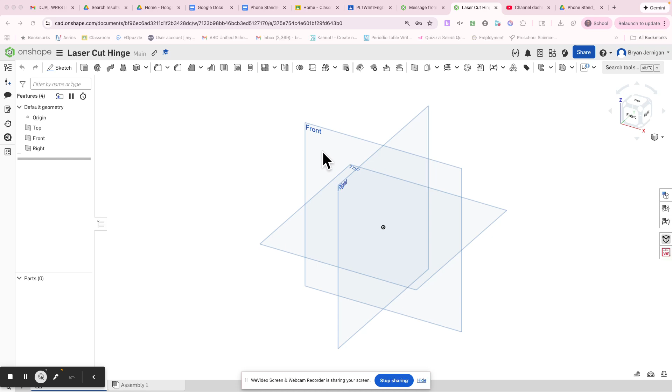So I'm going to show you guys how to create a laser cut hinge. Let's do a laser cut hinge.

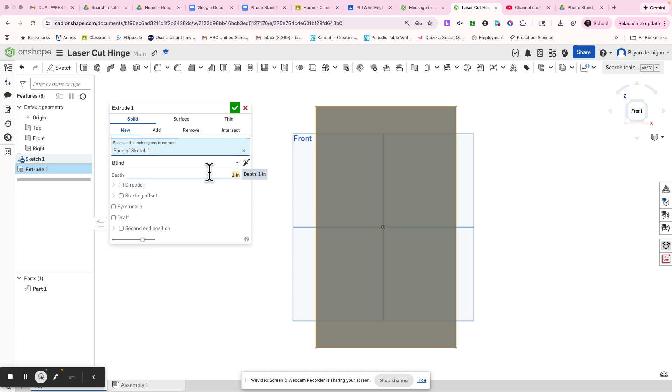First, we're going to create a sketch on the front surface, and our sketch is going to look something like this. We're just going to extrude that an eighth of an inch, or whatever the thickness of your material is.

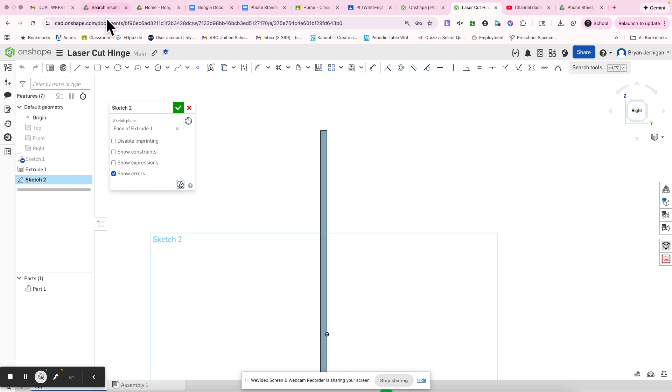Now we're going to look at the side of our part. We're going to create a new sketch on this surface, and I'm going to look at that surface and draw a corner rectangle down to about there on our sketch.

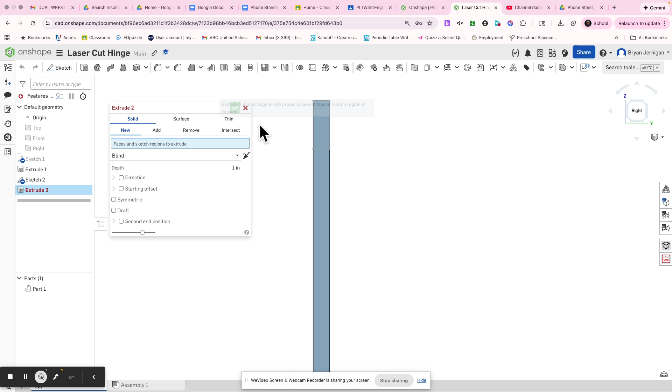We're going to go ahead and extrude that sketch. Of course, you're going to be using dimensions here. We're going to extrude that sketch some distance—I would choose double the thickness of your material. So ours is an eighth of an inch, so we're going to 0.25.

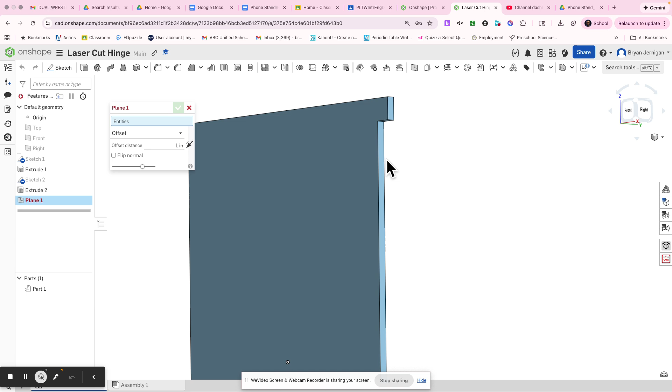In this case, I want to mirror that feature across the surface. So I'm going to create a work plane, and I want it to be a mid plane, between that plane and this plane. Now I have a mid plane.

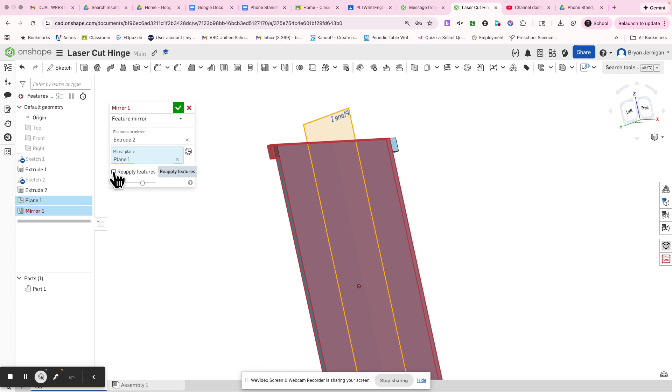Then I'm going to do a feature mirror. I'm going to mirror this extrusion, and the plane I'm going to mirror it across is going to be this plane. I want to reapply features so that I have this nub on both sides. I could turn off all my work planes now.

Now I'm going to do a new sketch on this surface. In this case, I'm going to use the middle of this part to create a circle.

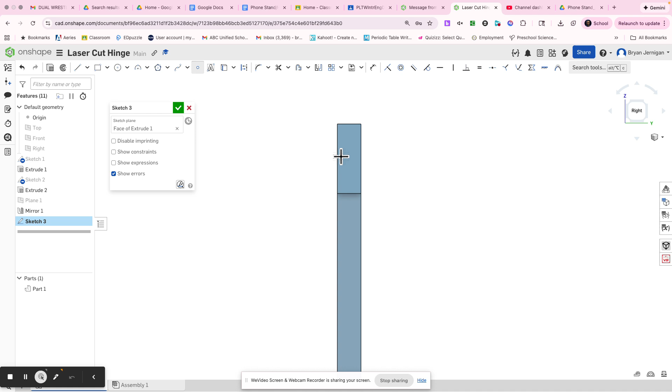I'm just going to use the point tool, going here to the middle. Actually, let's use this surface, that one, and this one. We're going to go here, go to the middle here, and then to the middle here, and go down, and then it gives us the middle point. So now we have a point.

Now I'm going to draw this circle so that it touches the corners. So there's my circle. I'm going to do another circle that's going to be larger than that first circle.

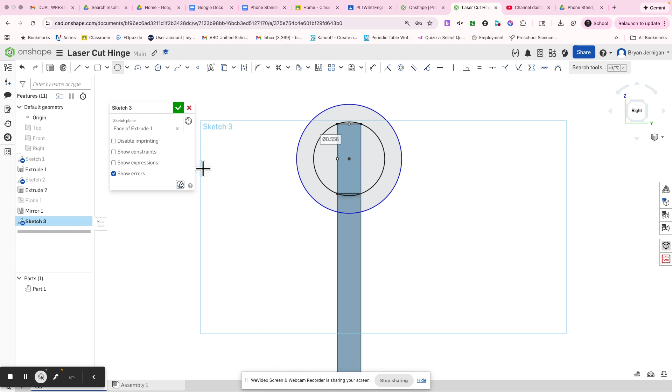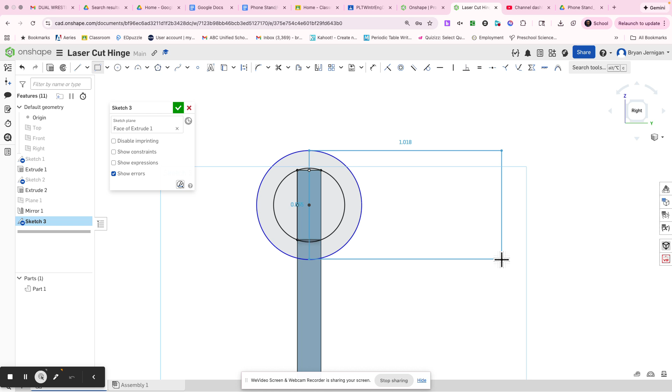Then finally, I'm going to do some lines that are tangent. Actually, we're going to do a corner rectangle again. We're going to go to the middle of that, go down to here, and then come out this way, touching here.

We're going to do coincident, this point to the circle, so they're touching each other. If you want to make sure that they're tangent, you could do a tangent constraint if you'd like. Then I'm going to trim away the parts that I don't want.

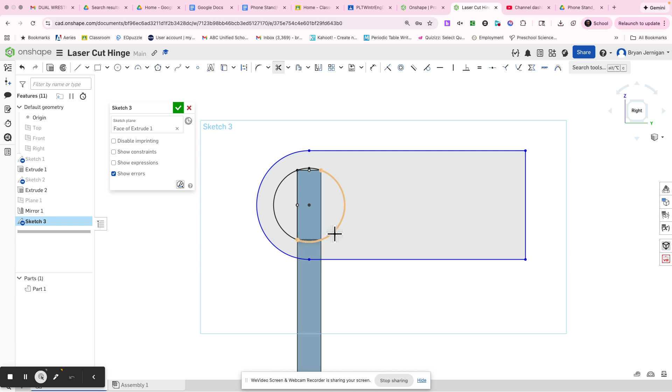The parts I don't want are this inner line, this line. I don't need this line. I don't need this line. I need this line. So now I have this shape.

I'm going to extrude this shape along with this piece right here. Actually, let's go back and edit that sketch to get rid of that piece of a line that we don't need.

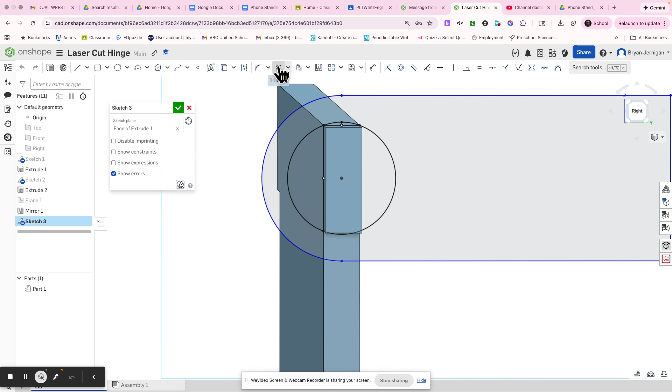So there's a couple of lines we don't need. We don't need this line, this line, this line, over that line. Everything should be good—make sure this is tangent to this. Now we can extrude sketch 3.

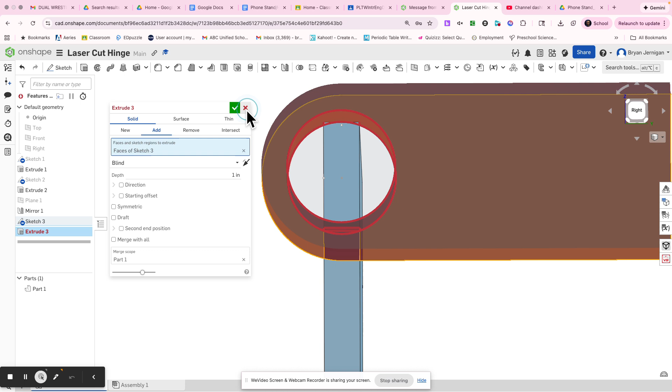I think we still have a line that's not working for us. We do—we have this line here that we need to get rid of. So we're going to edit that sketch. Normal. Yeah, okay, so I don't need this line. Now I should be able to extrude.

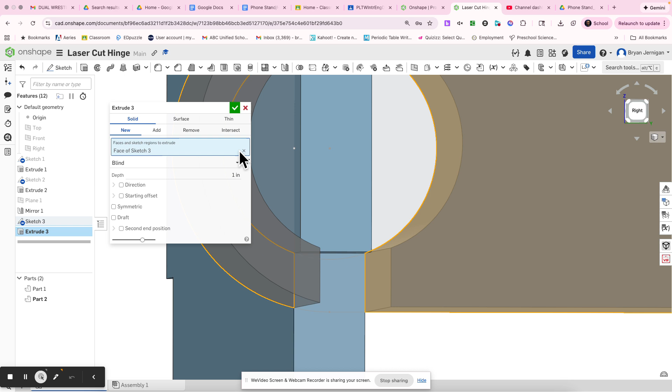Oh, there's still another piece of a line. Let's edit the sketch.

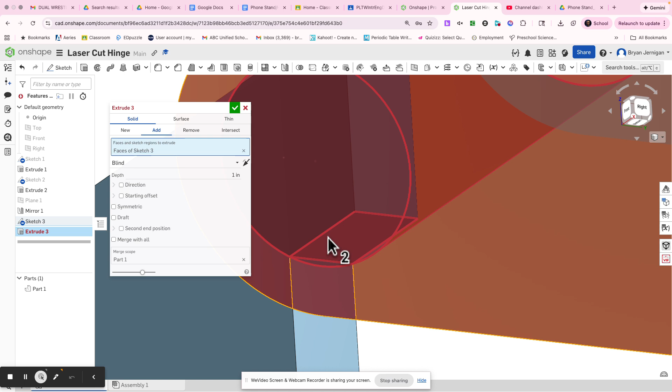All right, let's try one more time. Huh, it is. Oh, this needs to be new. That's why - we change this to the thickness of our material, and it's new. And so now I have a part that looks like that.

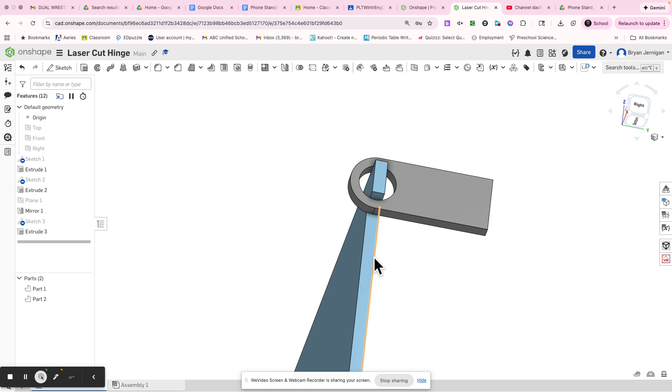Next thing I'm going to do is pull up my mirror plane. I'm going to mirror this part across that plane. So now I have, and it needs to be new, those parts on both sides. So now I have a hinge. A hinge.

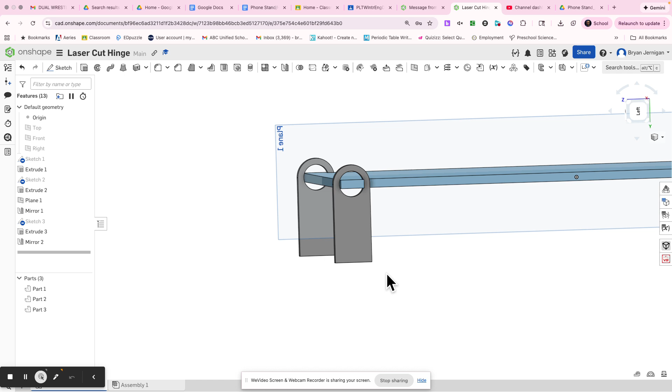Okay, if I wanted to do a base to this, we do a new sketch. So what are you doing? What are you working on? You haven't drawn anything? You haven't done any sketching? What's going on?

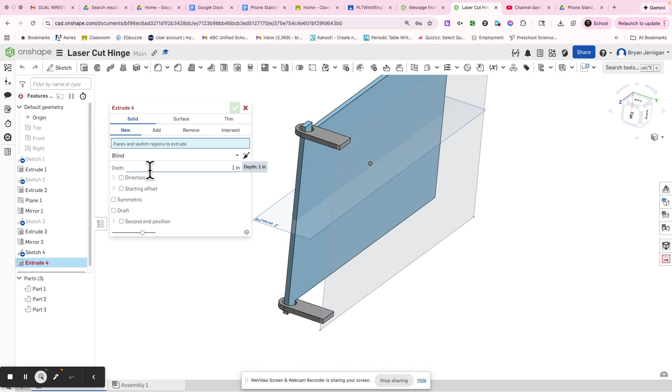Okay, so have this bottom part. Let's go ahead and extrude. Extrude sketch 4, let's go the other direction. Let's go 0.125.

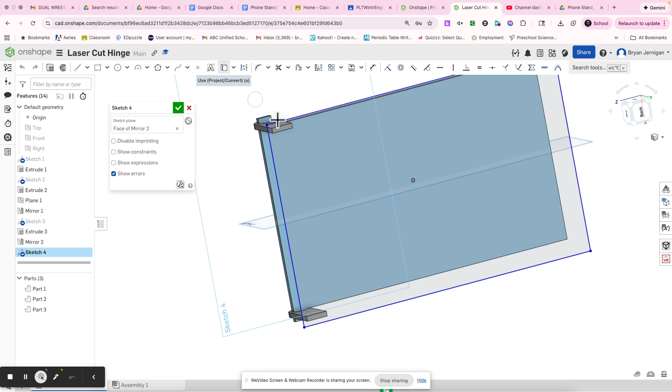Actually, I'm going to use this so I can go ahead and edit the sketch. And let's go ahead and use these geometries so that we can have that part removed automatically. Extrude sketch 4, the other direction. Thickness of my material is 0.125. And then click the check mark.

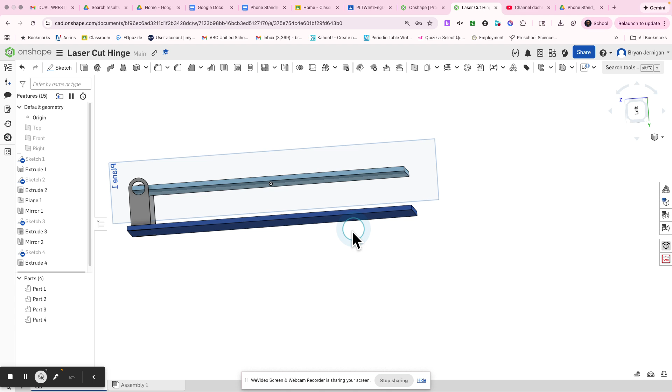All right, so now I have this odd looking shape. It doesn't really do anything but show you guys how a hinge is made.

So then I'm going to go to my assembly and create a new assembly. I'm going to insert - just do all of Part Studio 1, so it's all together. And now I'm going to fix some things in place. So I'm going to fix this blue part in place, fix that part in place.

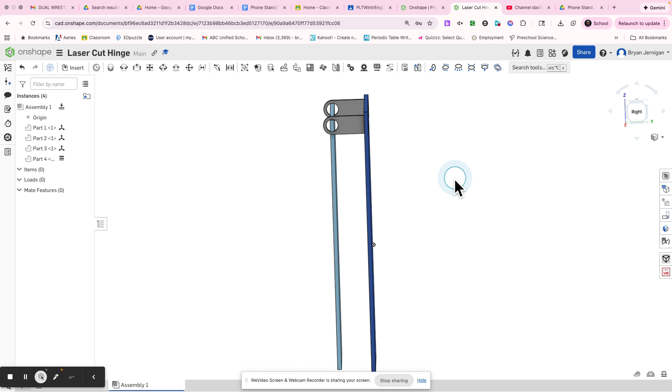I'm going to go ahead and mate these. Actually, I can fix these two. Fix this part in place, fix this part in place. And then this part, I'm going to have to move - so we're going to go ahead and move this out of the way.

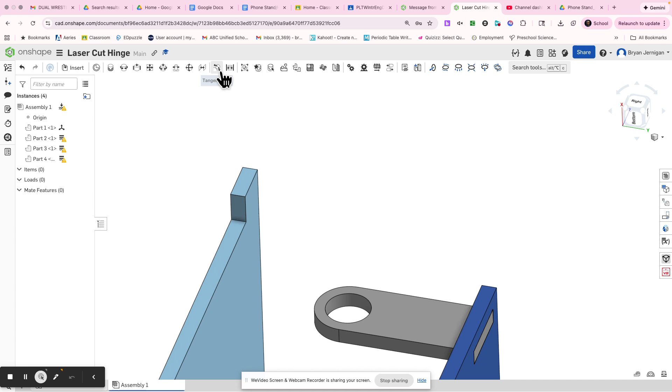And I'm going to do a tangent now. So actually, I'm going to do a revolute. So we're going to do - we can do tangent, let's do tangent. So we're going to do a tangent constraint. We're going to take this corner, that edge, and make it tangent to this circle.

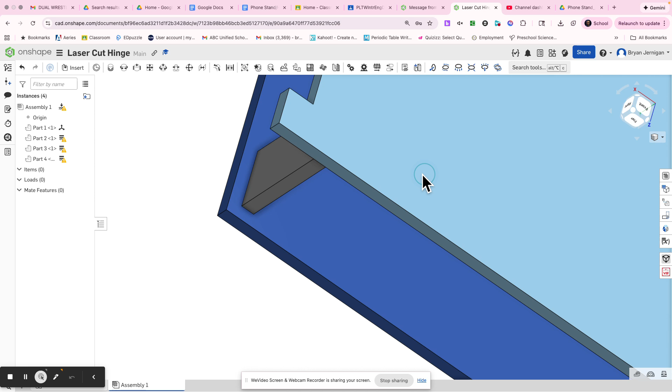All right, and then I know that I want this piece to be flush against this piece. We're gonna redo it, let's redo it. Let's take the tangent off. Instead, we're...

gonna do an offset. So we're gonna use the center mate constraint, so we're gonna use a revolute. We're gonna do revolute, and find the center one of this. And I know that's the center one of that. And we're going to find the center of this hole, and put it to this.

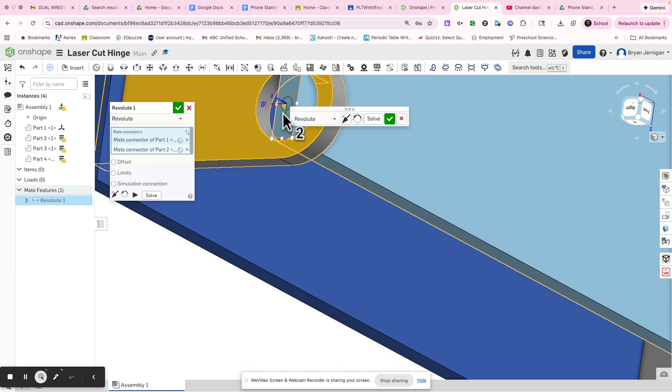And then we need it to be offset, right? So we need this gap to be closed. So we're going to do an offset, and the offset is in the Z direction. And I know that's going to be 0.125 in the Z direction.

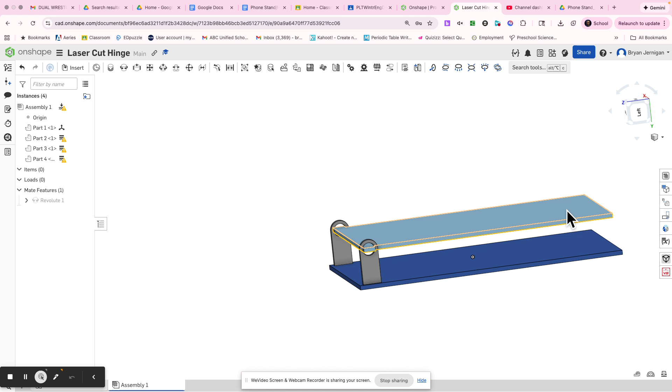And now it's finished. Okay, so now I'm going to go ahead and finish the sketch. And you can see that this now rotates inside of our part. And you have a hinge without any 3D printing.